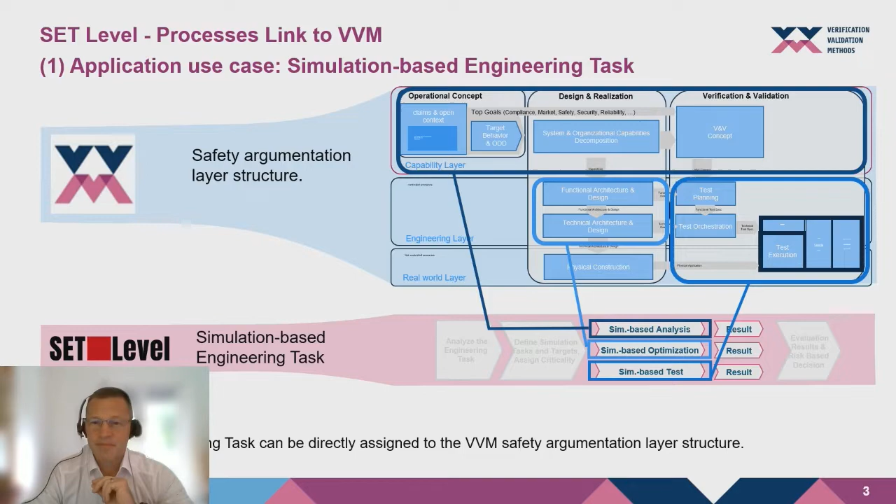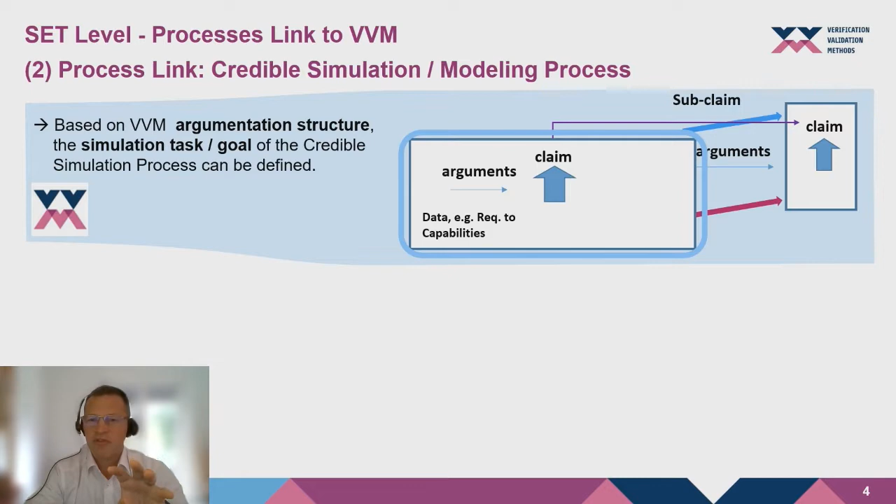So, thank you. Now I'd like to give you in a nutshell what is the link between both projects, how they work together. For us, the argumentation is the main idea to argue that highly automated driving is safe. But such an argumentation has claims and subclaims and arguments, like a big network of argumentation. And each of these claims and subclaims need evidences. And this is where SET Level comes in. Please click. Now SET Level is the provider of important simulated evidences.

But in the morning, Mr. Heigl explained a lot about how important it is to exactly specify what the simulation has to turn out. And so please click again. What is, for example, the objective? What is the environment and what is the system under test? Really clearly defined. Our arguments now can clearly define these three areas, because if these arguments give the real configuration of the simulation task, then the evidences on the other side exactly fit the claim. And this is the circle, the nutshell I want to tell you.

So when we argue, the arguments directly define what a simulation-based task has to turn out, and then the evidence suits. And so our argumentation at the end fits, for example, to argue that highly automated driving is safe. This is the nutshell of the link. And now I have the pleasure to hand over to Christian Neurohr to see a direct application in the criticality analysis. Thank you.

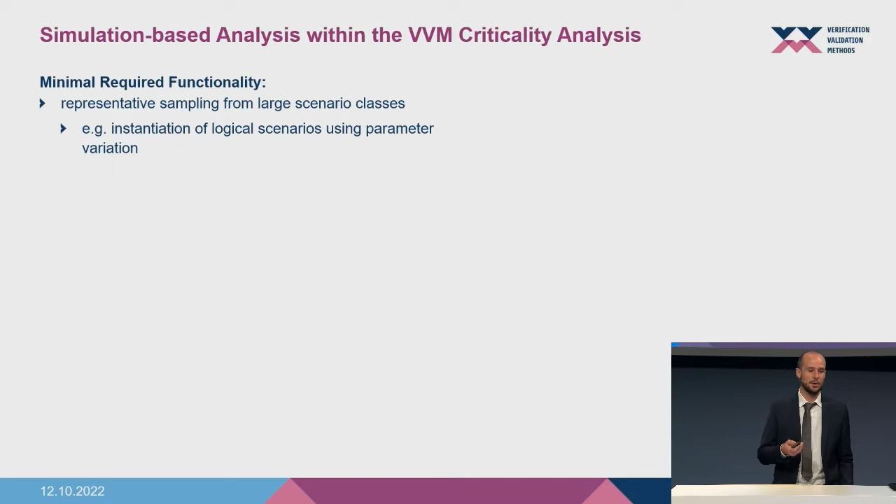So how are we using the simulation-based analysis provided by SET Level within the VVMethods criticality analysis? So for this, we have some minimal required functionality on simulation. We need to be able to sample scenarios from large scenario classes, and in the best case, it's also representative. And one example of this in the current terminology is the instantiation of logical scenarios using parameter variation.

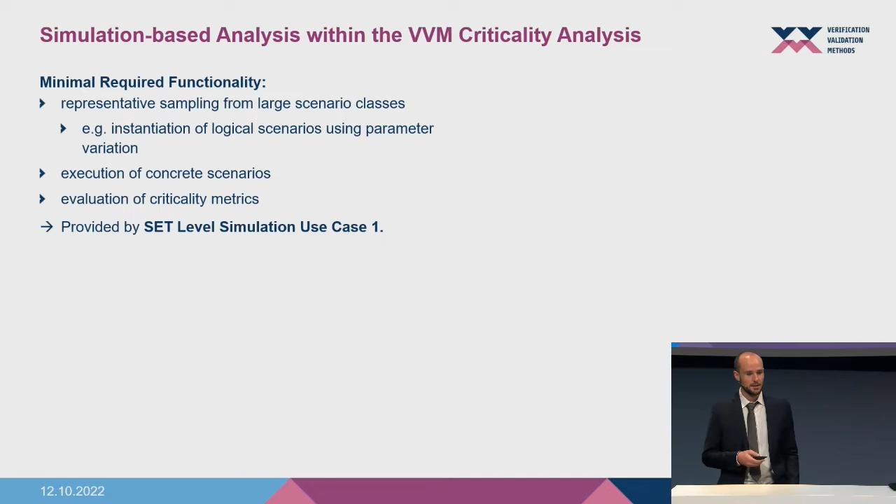Another basic functionality is the execution of concrete scenarios in a simulation. And of course, the evaluation of criticality metrics. So common examples include the time to collision or the post-encroachment time. And this basic functionality is provided by the SET Level simulation use case 1, which also is named criticality analysis, so this is not a coincidence.

And how are we using this in the VVMethods criticality analysis? Well, the abstraction and refinement of criticality phenomena and causal relations can be aided by the use of simulation. We have this large application area where we try to engineer new criticality metrics or find target values for existing criticality metrics and compare such metrics between each other. So this is a very important use of simulation.

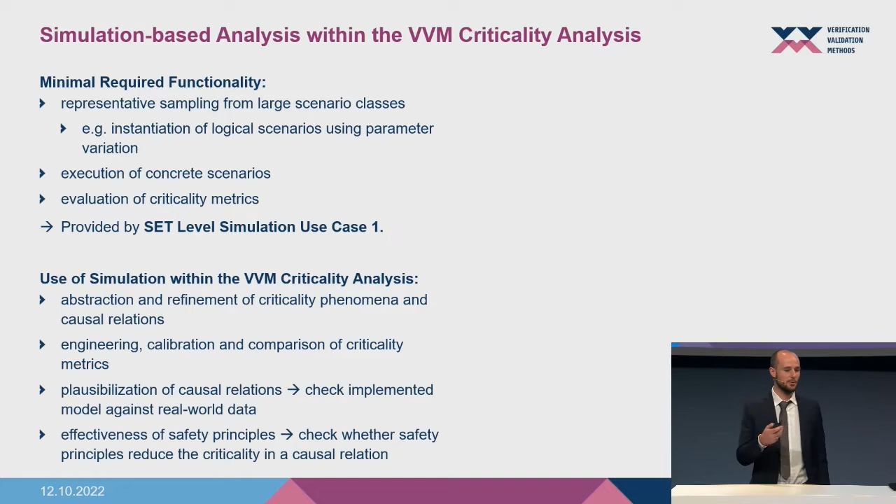And on an even deeper methodical side, we want to use it for the plausibilization of causal relations, where we really check real-world data versus the model that we implemented, and also in order to evaluate the effectiveness of safety principles, such as when it rains, maybe you have to drive a bit slower, or when there's an occlusion, you can already anticipate something. Such safety principles can also be evaluated in a simulation, whether they reduce the criticality that's emerging from a causal relation.

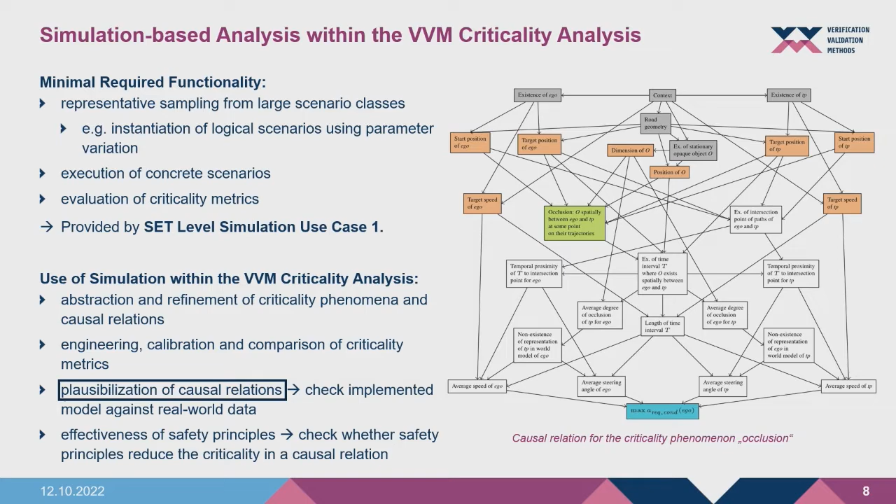So for the rest of the talk, I'm going to dive a bit deeper in this application called plausibilization of causal relations. On the right, you can see a graph that represents a network where in green we have a criticality phenomenon, occlusion, so we are not able to see an object because it's visually blocked by another object. And we want to understand how it affects criticality and especially its effect on the required acceleration. And the orange variables that you can see are the adjustment variables which we have to be especially careful of. So you don't need to understand this graph in detail at this point.

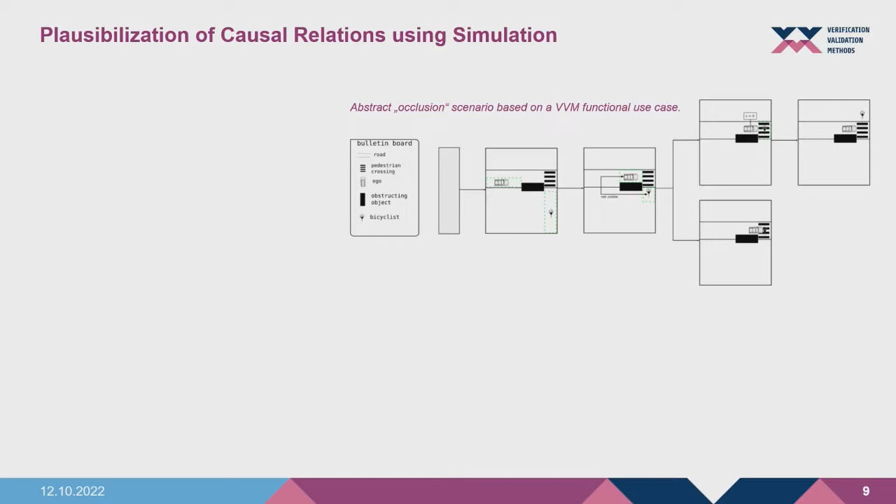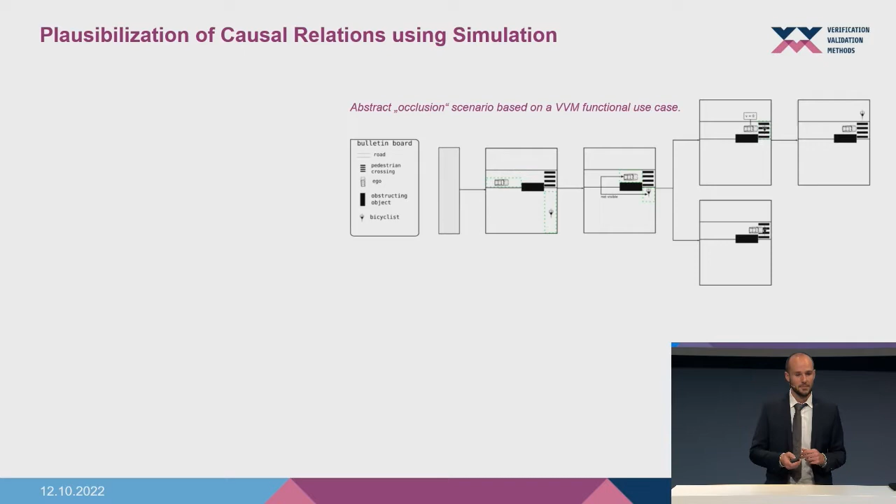So let us look what's necessary for this simulation-based analysis task. So in the criticality analysis, we usually start with some abstract scenario that features the phenomenon. Here we can see some very general urban occlusion scenario depicted as a traffic sequence chart. And our analysis task now is to generate data for the relevant random variables in this graph that I just showed.

Based on these orange adjustment variables that can be identified via graph algorithms, we want to evaluate in many scenarios whether the phenomenon is present or not. And of course, we want to measure criticality with a suitable metric, such as some TTC or required acceleration, or whatever fits the purpose of making criticality visible for that phenomenon.

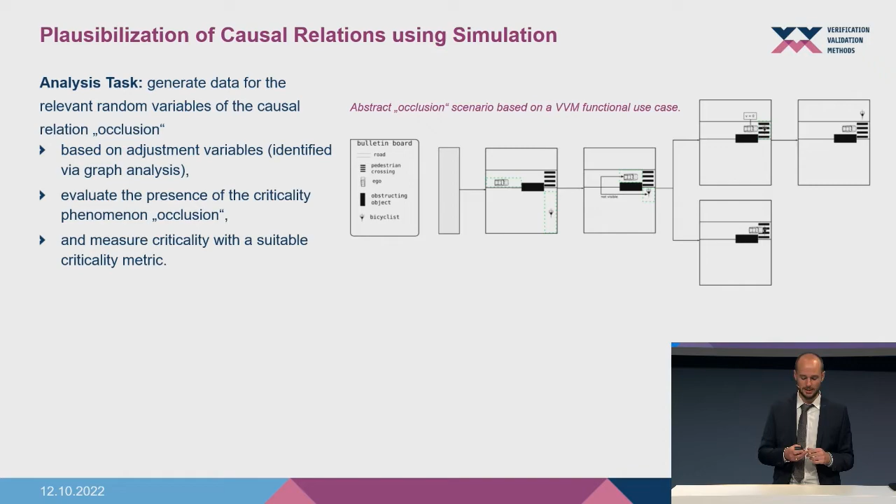And as an example, then we go the step from the abstract to the logical scenario. For example, on the bottom left of the slide, I put some parameter ranges, how a logical scenario could look like in the simulator CARLA. And the approach in general is to model the causal relation, including its context, as a logical scenario for the assessment in a simulation. And for this, of course, OpenPASS can be used.

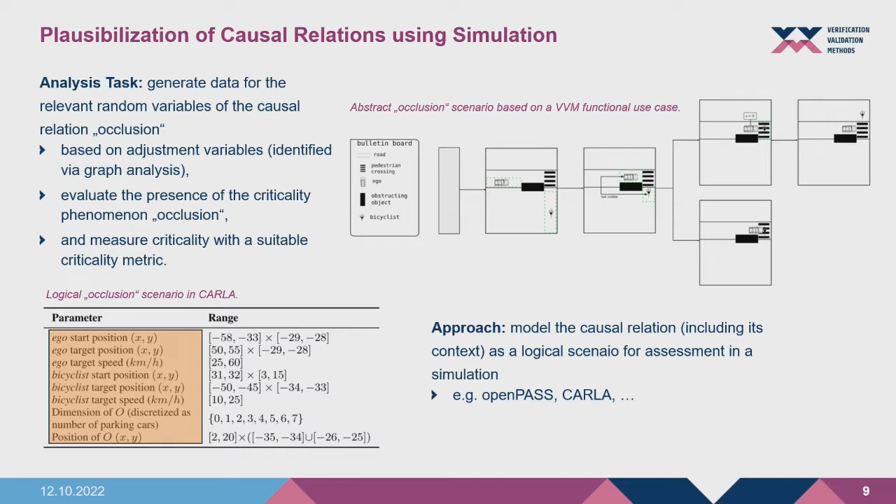It's very prominently developed in SET Level and used by VVM, or CARLA can be used, or other proprietary simulators, of course, as well. And in this case, these are the variables that we need to perform the parameter variation across in order to be able to identify causal effects. And so the last slide will be about the evaluation of such causal effects and modeling quality.

Of course, this is much too complicated to explain in detail, but we want to evaluate quantities such as the average causal effect. So what is the expected value when the CP is present versus when it's not present, or of course the relative quantity, that is the relative causal effect. And on the other hand, we want to be able to quantitatively evaluate whether our modeling efforts satisfy our requirements. And for this, we could, for example, calculate the extent of explanation of criticality by a phenomenon. So how good did our X really explain criticality as measured by phi?

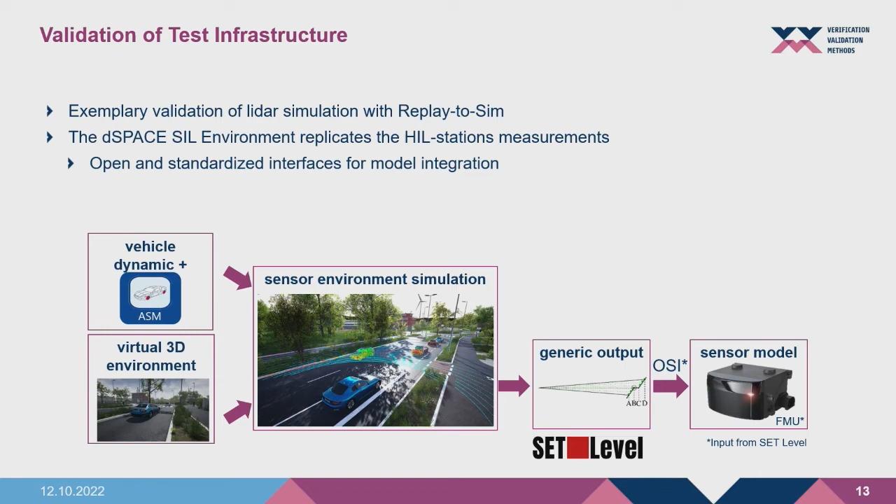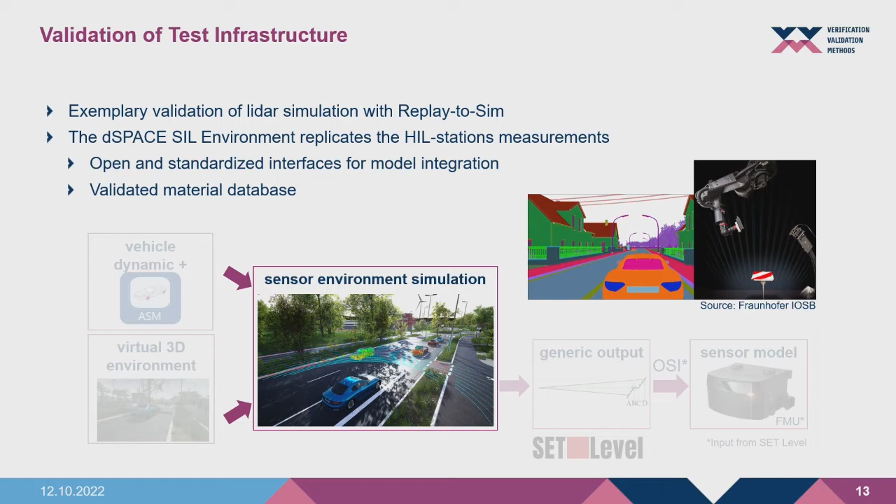So how does this look when you then start your simulation? Of course, you need an environment simulation, in this case, dSPACE tooling, ASM. You have the virtual 3D environment there, you have the sensor environment simulation, and then you compute the generic output, in this case, the reflections, and the reflections are then passed over to the sensor model with the open and standardized interfaces, in this case OSI. And so the sensor model from SET Level was passed over to VVMethods as a functional mockup unit, FMU, and could be used there. Also, we used a validated material database to ensure the simulation quality.

When you then start the validation process, you need to have a test specification for this. And we found a very interesting finding actually, that the specification for validating the test infrastructure is actually the same as for validating the automated driving system. So you have meta information, you have the test infrastructure for assessing the simulation test cases, the sequence, and also the evaluation of the success of this validation.

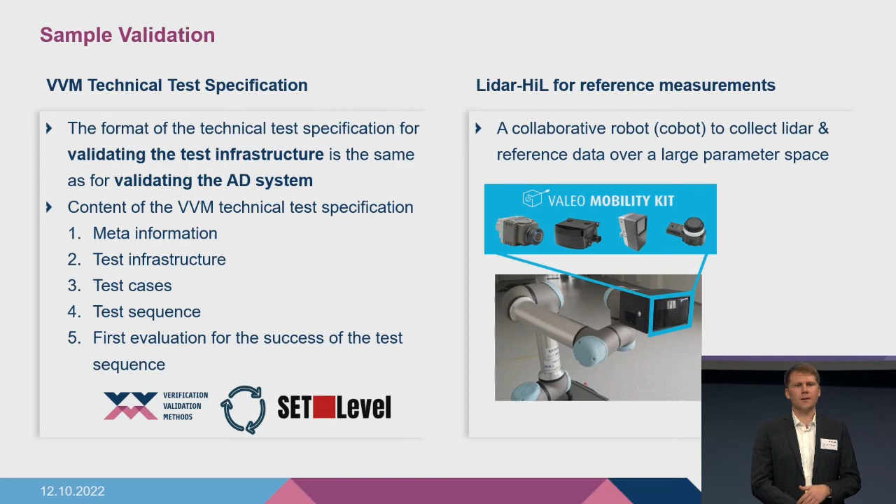And another interesting device I would like to show is that we use a collaborative robot to collect the LiDAR data and also the reference data, because reference data, as I said, is very important. We come to this probably later when there's a presentation about simulation credibility and validation. And in this case, we did measurements of different asphalts to start with, and this work for the validation is still ongoing in VVMethods.

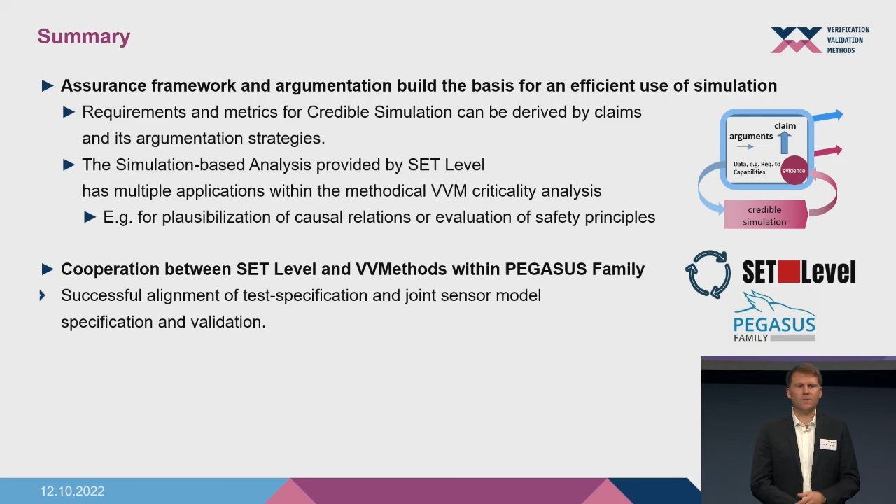So to summarize this, first finding, the assurance framework and argumentation build the basis for an efficient use of simulation. So the requirements and metrics for the credible simulation can be derived by claims and the argumentation strategies. The simulation-based analysis provided by SET Level then has multiple applications within the methodical VVM criticality analysis, for example, the plausibilization of causal relations or evaluation of safety principles. A second, and I think very great and important finding, is that we had great cooperation between the projects, for example, with the successful alignment of the test specification and the joint sensor model specification and validation.

And I would like to end with the assurance framework, and that it supports simulation and data processes so that exact-fit evidences for the assurance argumentation can be provided, which is great.